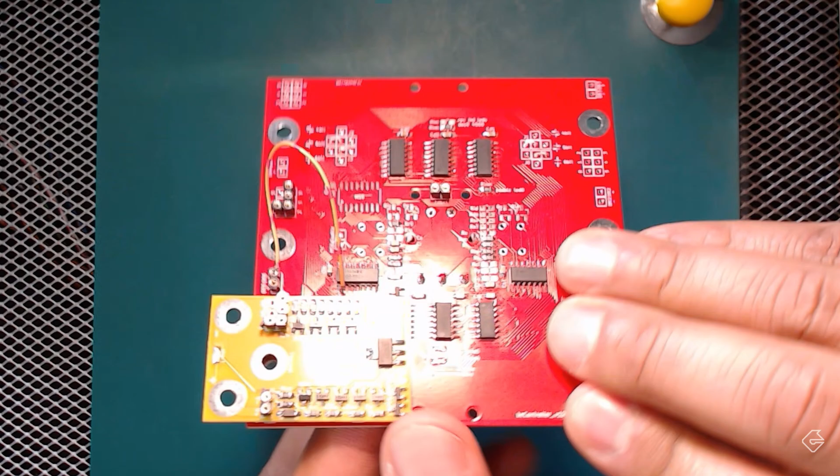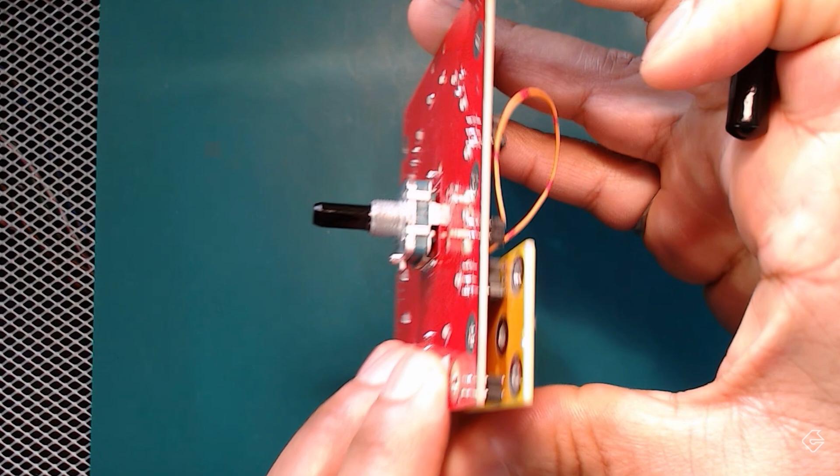If we flip the controller board over, you'll see there's actually room here for 6 of these driver modules. Here's one right here, another one can go there, another one over here, and 3 more on the opposite side. And the way this driver module is connected, it's actually just plugged in using a set of pins. I know it's tough to see on the camera, but these 2 here are the power pins, and if I roll it that way, these ones over here are the 6 data pins.

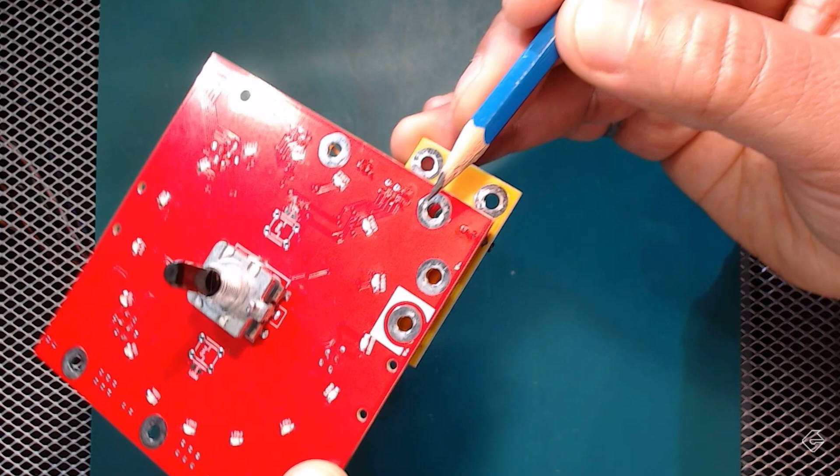You might notice though, this thing is a little bit flimsy. So one of the things we're going to need to do is 3D print a support that'll serve as a conduit for this thermal connector in the middle, so it connects to the controller board on the other side. These other 2 connections here, those are the connections that will send the current right out to the LED.

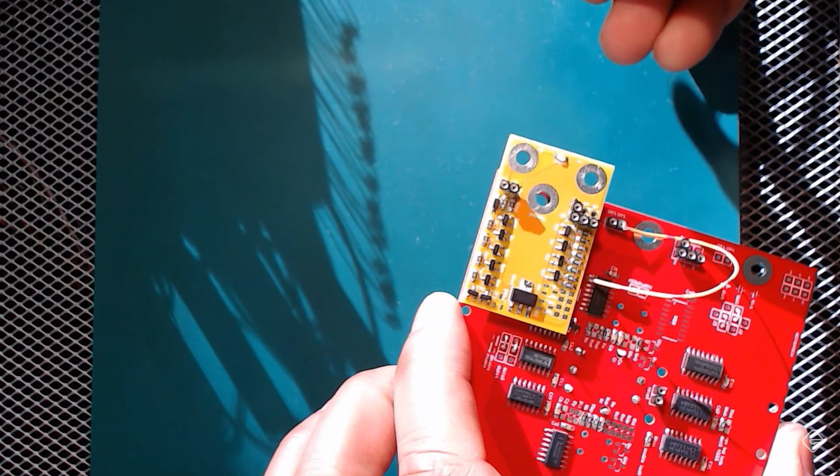These connections have been designed for these spade connectors. These spade connectors will connect to the board using a screw, washer, and nut combination. So we have a washer on the top here. I know it's tough to see, but it will slide into the spade connector like so, and the hex nut at the bottom will anchor it to the board. The hex nut will be positioned like so, but there needs to be something in place to prevent the hex nut from spinning when screwing it in on the other side.

This thermal conduit's also going to use a screw, which is going to attach to the bottom of this controller board using the same hex nut. So we also have to devise a way for that hex nut at the bottom of the controller board to not spin when being screwed in from the top.

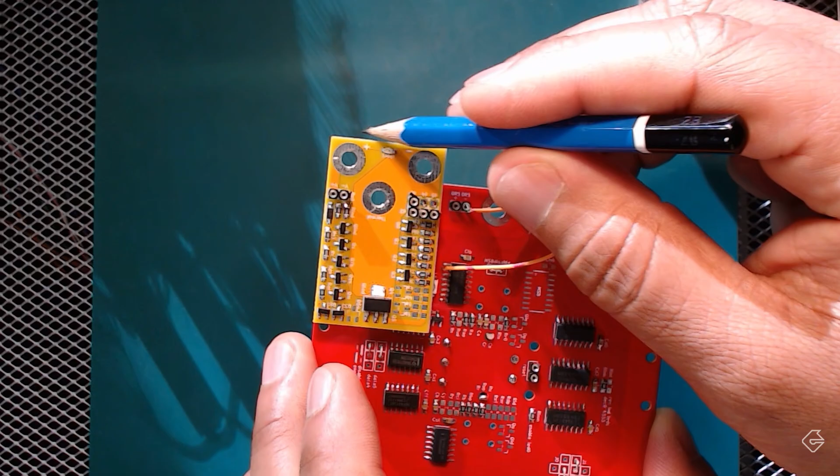So this part that we're going to be designing is going to have at least 3 hex nuts, one for the positive, one for the negative, and one for the thermal. It's going to have a spacer to make sure that this thing doesn't jiggle around. It's going to include a rim to fit snugly around this driver. And this entire part is going to be pretty small, so it's going to have some intricate details.

Let's start with our first line of code. Let's start with defining a parameter for the radius of these hex nuts. Now, if you're following along and using your own nuts, they're probably not the same size as mine, so you might want to get yourself a micrometer, which is fantastic for measuring these tiny little parts. The radius of the hex nuts that we're using measured in at 3.5 millimeters.

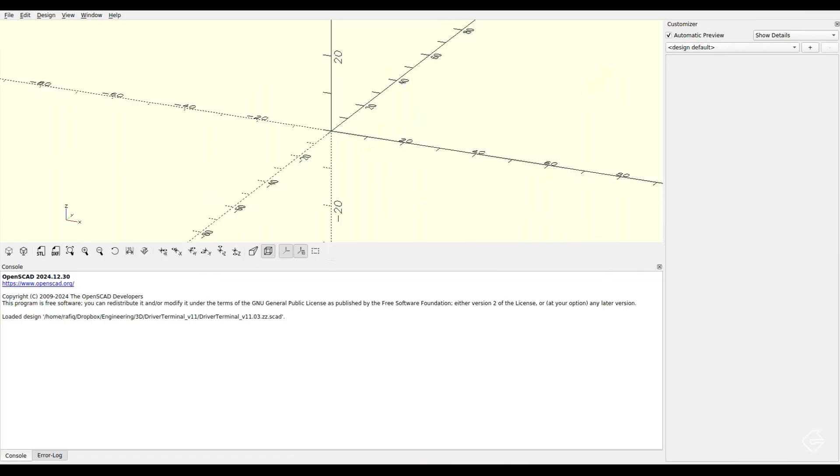Every instruction needs to end with the semicolon. You're going to see as the code gets more complex that some lines don't have semicolons and some do. You'll understand why that is as we start getting into it. And when you render it, there it is. There's our little circle.

Now, a couple of things you'll notice about this circle. One, that circle was created at the origin, meaning the intersection of the X, Y, and Z axes. When any sort of object is created, it's always created at the origin. You'll also see that the circle was created face down on the XY plane. This is also one of the rules of OpenSCAD. Every 2D element is always created flat on the XY plane. And finally, you'll notice that the circle appears to have a thickness, even though we didn't really give it a thickness.

So speaking of that, let's give it some thickness. We're going to add another parameter called hex nut thickness, and that thickness is the thickness of this hex nut, which I've measured at 2.3 millimeters. To give this circle some thickness, we use a command called linear extrude.

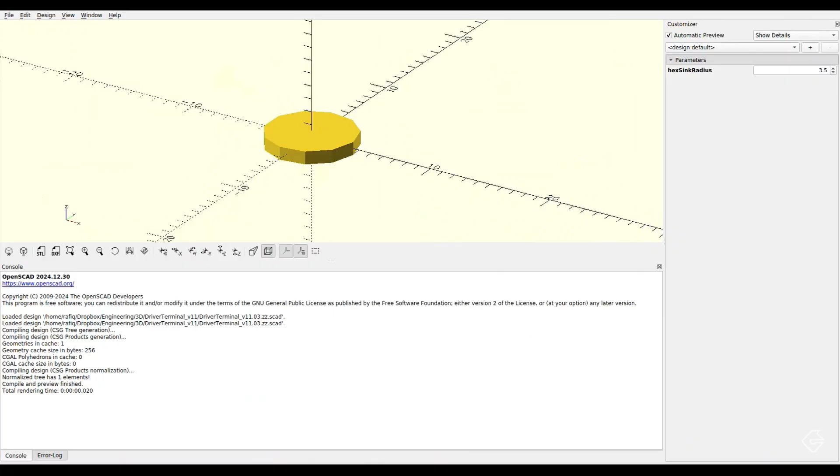Jumping back into our cheat sheet, you'll find it right here under the 3D box. And it shows here that linear extrude accepts a few different parameters. The only value that's required here is height, and so that's the only parameter we're going to give it, the thickness of this hex nut. And when we render that, look at this. Now it's got a proper thickness.

Every 2D object that is extruded by the linear extrude command always extrudes in the positive Z direction, and the resulting 3D object will always sit on the XY plane. Now it's nice that this solid was created at the origin, but that's not really where it's supposed to be. It needs to be translated to its rightful place.

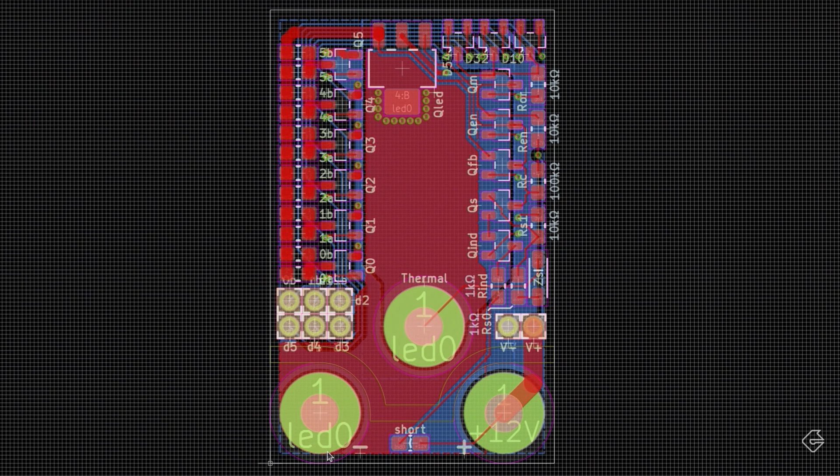This is where that hex nut is going to fit around. If I open up the properties, you'll see that the center of this terminal was positioned at 5 millimeters X and 5 millimeters Y. Going back to our physical one, the center of this terminal is 5 millimeters to the right and 5 millimeters up.

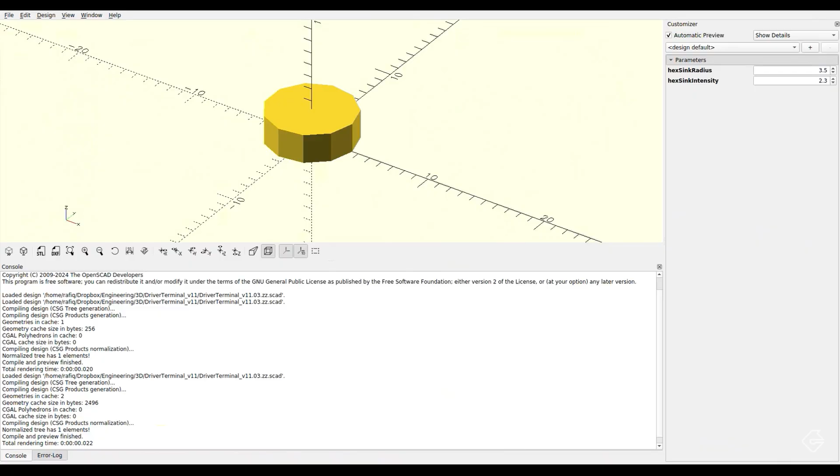Here's the command to translate this linear extruded circle to 5 by 5. You'll also find it on the cheat sheet under transformations. Note, translate actually includes a 3-dimensional vector, x, y, z, but it will accept a 2-dimensional vector like we've put in here. When we render that, our solid moves 5 millimeters to the right and 5 millimeters up.

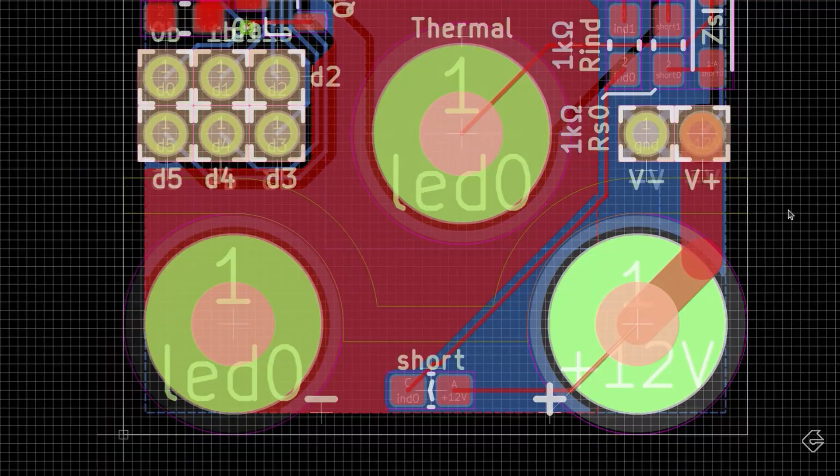But remember, there were 2 terminals. That means we're going to need 2 hex pockets. Going back to the PCB design, there's the other terminal right over here. I could find the location of this terminal too by opening up its properties. See, this one's located at 23.4 millimeters in the x-axis and 5 millimeters in the y-axis. Going back to our physical board, that's this one right over here.

So to create another solid in our code, we simply need to add another instruction. We're using the same circle hex sink radius instruction, linearly extruded by the same intensity, but the translate is different. This one is actually translated to 23.4 in the x direction and 5.0 in the y direction. Rendering that, now we got 2, both positioned in the proper place.

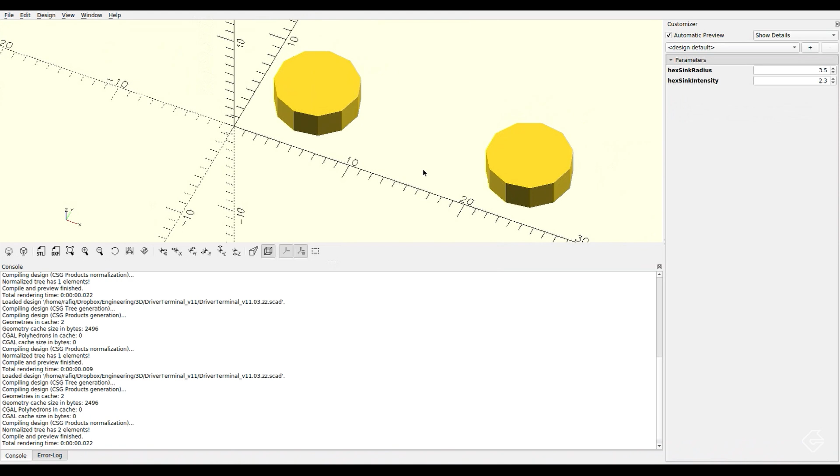Notice in the code, we've defined parameters for these values over here, but the translate vector does not have a parameter. We could create parameters for each x and y offset for the translate vector, but we can also create a parameter for the entire vector, like this.

Here's a parameter, we'll call it vTerminal0, and put the appropriate xy measures in there. And here's the other parameter, vTerminal1, we'll put the appropriate measures in there. Then I'm going to change this hard-coded value over here to reference the new parameter, and the same for this one. Notice how I prefix these parameters with a small v.

I'm going to want to include some comments to describe what we're doing here. So right at the top, I'm going to insert a comment that highlights a v refers to a vector, and it should, in most cases, have an xyz coordinate. You notice how the vectors are encapsulated in these square brackets. That defines a list of items. In this case, we're defining a vector with an x and y component, so it's a list of two values, x and y.

We've seen in this cheat sheet that we could add a third value in there to make it x, y, and z. But those square brackets don't have to mean just vectors. They can mean any arbitrary list of elements. The other parameters in the code define the radius and intensity of these pseudo-cylindrical objects like these hex nuts.

Now we're going to see a few more cylindrical objects in our code, like these screws and washers. So there's a way to kind of package up these two parameters that describe the same thing by using the same concept of a list. But if we keep our naming standards well defined, then it will be easy to remember as we go forward.

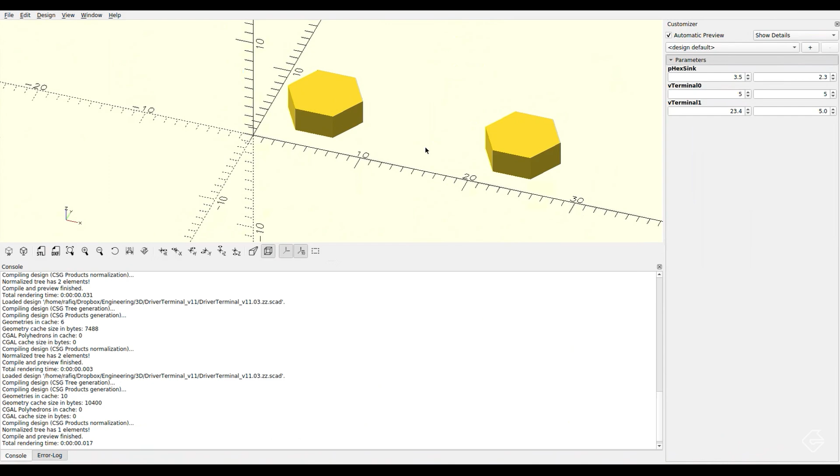All we need to do in our code is include a little $fn equals 6. Rendering that — oh look, we got hexagons. These are beautiful hexagons, but we're not actually recreating these hex nuts.

The hex nuts are right here. We need to create pockets for these hex nuts to fit inside. So rather than creating a solid, we need to create a larger solid and then subtract the hex nut we've just created from that larger solid, giving us a place to insert these metal hex nuts.

So I'm going to add 2 more lines to our code, which will create 2 more circles for now, and then include them inside a difference scope. It looks like this. Now all of the solids inside the difference scope will be subtracted from the first solid in that difference scope.

But these new solids I created are roughly the same radius as the hexagons. We need to make the first solids a little bit bigger, so I'm going to define a new parameter called twallmin — thickness of a wall, or the minimum thickness of a wall — and pop that parameter right at the top, setting it to 0.4.

The reason I'm setting it to 0.4 is a limit of my 3D printer — the thinnest it can print a line is 0.4 millimeters. That's why I define this as twallmin, set to 0.4. Your 3D printer may be different, so choose the value that is best for your printer.

Then I'm going to add that value to the radius of these 2 circles. Notice I've multiplied it by 2, because although the printer can print a single 0.4 thick line, I want to give it a little bit more meat and solidity.

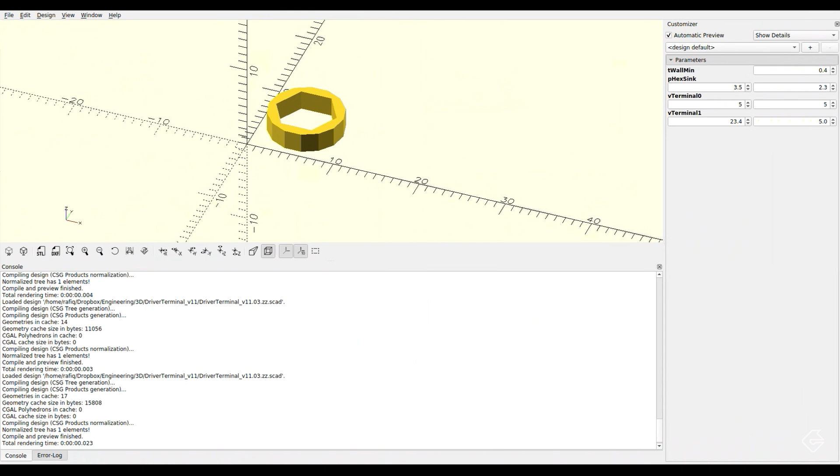That's not exactly what we're trying to do. What we need to do is combine these first 2 circles together, and we can do that with a union scope. Now, the way this is written, the difference instruction will take the union of both of these circles. Yes, those circles are distinct solids and they won't actually be physically combined, but it will be logically combined into a solid. And then the other 2 hex pockets will be subtracted from the union of the first. Rendering that, we get exactly what we expected. 2 circles with hex pockets carved out from the middle.

Now these are really beautiful, but those hex nuts will kind of slip right through. They actually don't have any sort of pocket to fit into. And we want to make sure that when we insert the hex nut, it sits snugly onto a surface. So we're going to have to cover one of those open sides of that pocket. But see, that's a challenge in the way that we've defined our code right now, because this linear extrude function applies to everything inside that scope, which means the pockets and the surrounding material are all linearly extruded to the same height. We don't want that. We want the surrounding material to be extruded to a bigger height than the pocket that's inside.

So the first thing we'll do in our code is create another scope down here called hex pocket, and I'll take this and call it the hex pocket surround. Then I'm going to move these hex pockets into that new scope that we just created and remove them from the surround scope. Finally, we have to take this difference scope and apply it across both of these linear extrudes. Now that we've done that, this union scope is no longer necessary, so we can remove it. And let's not forget, we have to make the surround a little bit thicker, so we're going to give it just a little slice of material on the end of that pocket.

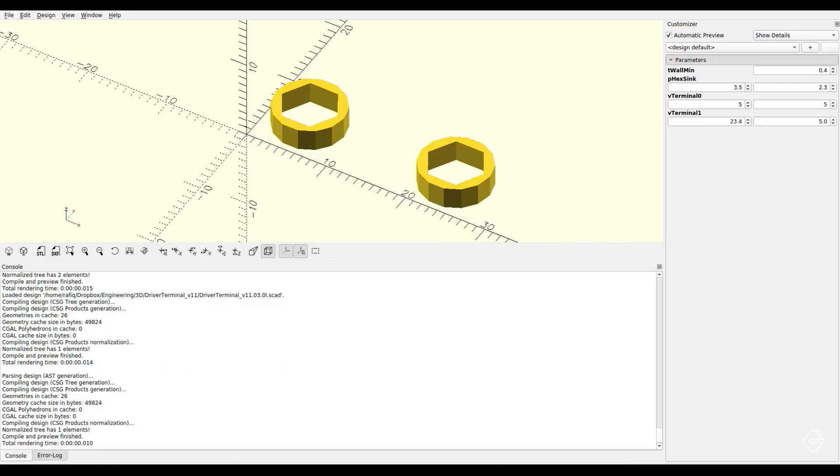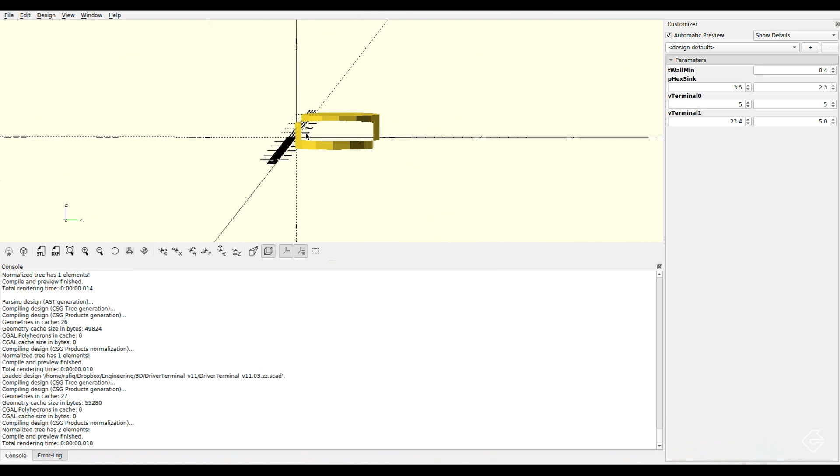Now when we render this, oh, look at that. We've covered it up and we can still kind of see those pockets on the other side. What's going on here? So this is a rendering anomaly that's actually caused by something we'll get into in a second, but there's actually two rendering anomalies here. Let's reorient the view so we're actually looking at these hex nuts head on. And here's another interesting thing going on. You see one hex nut kind of disappear behind the other. This does not look right, and it's in the way that OpenSCAD is rendering these objects. Lucky for us, there's a really easy way to fix both of them. Well, I should say there's an easy way to fix one of them. The other one is a little bit more involved, but you'll get it.

In the cheat sheet, you'll notice under linear extrude, there's this value here called convexity, and it shows up elsewhere as well. Here's one other one in rotate extrude. There's another one down here in this thing called Minkowski. This convexity business is described in the other category here under render. And clicking on this gives you some information about what this convexity is. I encourage you to read it because it's quite educational, but the bottom line is that OpenSCAD is rendering these objects in an efficient way. It's basically taking some objects that are behind one another and deliberately not rendering them so as not to slow down the system or the processes.

And this convexity value basically tells OpenSCAD how many of those behind objects to render. So all we really have to do is give it a value greater than 1, and it will start to render those objects that are behind. So in our code, I'm going to create another parameter, and I'm going to call it fx0, and I'm going to make it equal to 2. The default value for convexity is 1, so 2 should improve our rendering. Then we simply add it as another value with convexity equals our parameter fx0 to every single time we do a linear extrude.

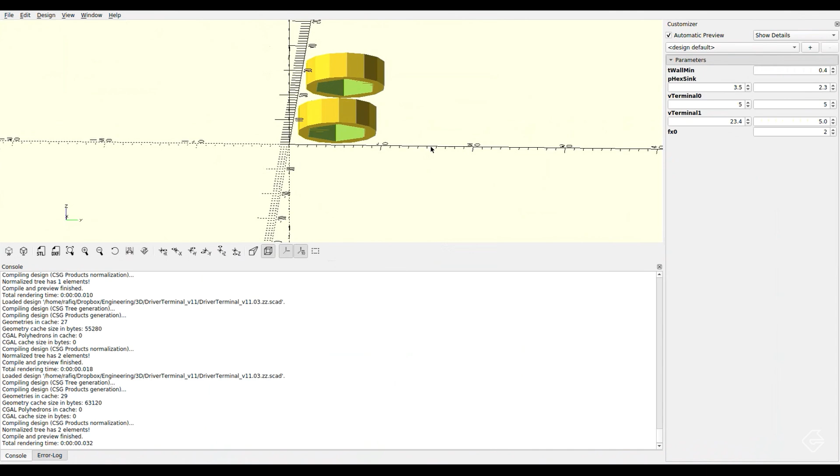Now when I render this, you can see that original kind of behind-object issue goes away. I can see both of these objects clearly, and that white rectangle doesn't appear. But we still have this other strange anomaly to deal with, which is this kind of fuzzy business that's happening over these hex pockets. The reason that's happening is because we've asked OpenSCAD to create a solid and then subtract a hex nut out of that solid.

Now, one of those sides has that extra wall thickness that we added. That's on this side. This side worked perfectly fine. But on the other side, there's a solid on the outside and a solid which is being subtracted. Those two solids share a face. And so because that face exists in the exact same place, OpenSCAD doesn't know whether to include it or remove it. And so what we're seeing here is almost like its indifference of, I don't know, should I keep it? Should I get rid of it? Keep it, get rid of it? We need to tell OpenSCAD whether to keep the face or get rid of the face.

And an easy way to do that is to take that hex pocket and just ever so slightly bring it out a little bit. We're going to bring it out by a value, what we call epsilon. Actually, I say we. The documentation in OpenSCAD calls it epsilon, so I'll call it epsilon too. We'll create another parameter in our code called tEps for thickness epsilon, and we'll give it a really tiny value of 0.01.

I'm giving it that value because we don't need a lot for OpenSCAD to determine that one face is outside the other face, but it's got to be small enough to not make a difference in our final output. And of course, our final output is going to be a 3D printed model, and 0.01 millimeters is way too small for my 3D printer to even notice. Your 3D printer may be different, so you might want to adjust the value depending on the limits of your printer.

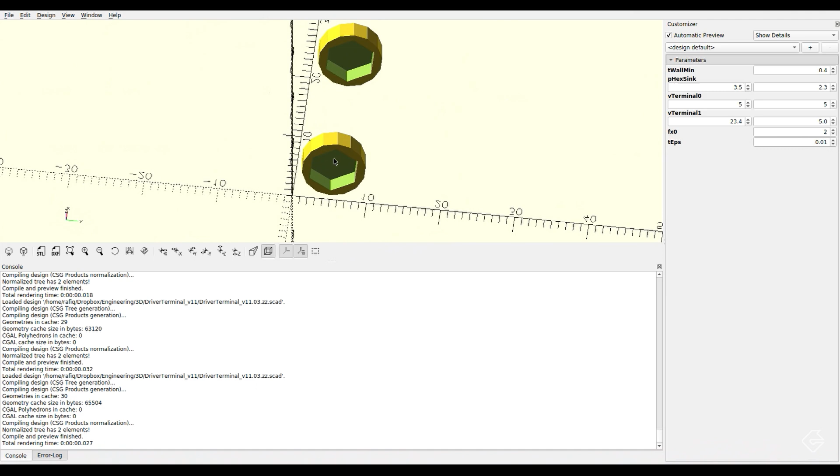So now if you remember one of the earlier videos about limitations of 3D printing, you'll know that printing these two hex pockets face down, although possible, may cause some issues because of the bridging that's going to be necessary inside here. I've done it before and we can continue doing it, but this part is going to be more complex as we start adding things to it. And because I know what complexities are coming, I'm going to rotate our part such that the final output will be easier to print.

Here's a through-hole version of that driver to demonstrate my thought. Right now, those hex pockets will be sitting on top over here, and it will be printed in this orientation. What I'm going to do is rotate everything so those hex pockets will be printed in this direction. That means a 90-degree rotation, and based on our orientation for our design, that's a 90-degree rotation around the x-axis. Back to our cheat sheet, you'll find rotate under the transformations window right over here. You'll notice that it's in here twice. We're going to use the first method.

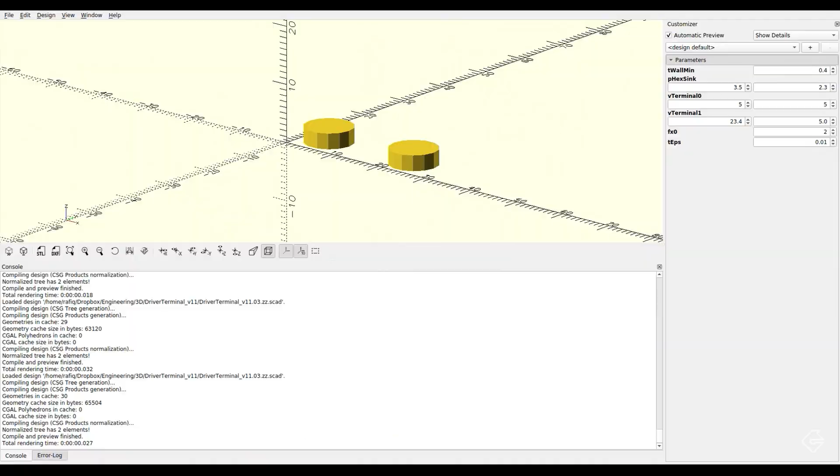To apply this rotation, we're just going to encapsulate everything inside this rotate scope. And I've given it a 90-degree rotation around the x-axis. Once I render that, both of the hex pockets got rotated 90 degrees around the x-axis. Now to make these hex pockets a little bit easier to print, and also because I want to explore some intricacies about this rotate command, we're going to rotate these hex pockets 30 degrees such that the corner ends up at the top. In our code, we can do that by adding a rotation to both of these circles that create the pockets. Notice I'm rotating them 30 degrees around the z-axis.

Now that's a key point because this rotation is occurring before this rotation. So the 30-degree rotation is occurring when those hex pockets are flat on the XY plane, in which case the Z-axis is straight up and down, and it'll rotate it this way. And then both of them become rotated along the X-axis to go here.

If we did it the other way, where we wanted to rotate the hex pockets after the rotation, we would apply the rotation to the y-axis as opposed to the z-axis. I know it's confusing, but this is the kind of thing you're going to have to keep in mind when creating complex objects in OpenSCAD.

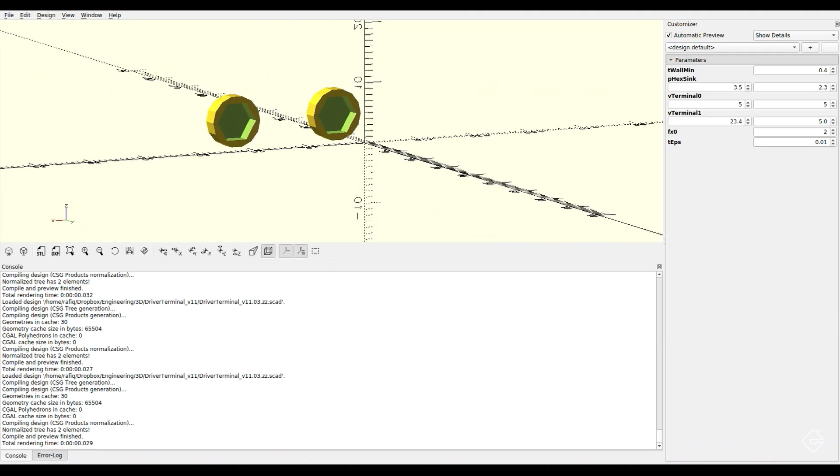So with this layout, when I render it, sure enough, my hex pockets are rotated the way I expected them to be. Now we always need to keep in mind the limits of our 3D printer. That's the reason we rotated it, so it will be printed easier based on things that we're going to add to this in the future.

But another thing to keep in mind as well is the minimum wall thickness. You remember how we identified that it's based on the limits of my printer. We chose a value of 0.4 for that minimum wall thickness. That is based on the minimum line that the printer can draw in the XY plane. But we've rotated this now along the x-axis, so that value no longer applies because my printer has the ability to get finer detail in the z-axis.

So rather than defining the parameter as a single value parameter, I'm going to change that to a three-dimensional vector, which might be the same for the x and y because my printer can only print a 0.4 millimeter thick line in the X and Y plane, but because it can print a 0.16 millimeter thick line in the Z direction, I'm going to include that into this vector. So here's what that vector looks like.

And then whenever we call that parameter, we need to identify which axis we're talking about. So for the hex pocket surround, I'm going to use the Y thickness, which is the 0.40. And then for the radius, I'll use the X thickness.

The other thing to consider when this object goes from digital to reality is that the plastic, when being extruded from our 3D printer, grows a little bit. And if we're trying to fit a metal hex nut into a pocket and we create that pocket exactly the radius of this hex nut, well, the thickness of the plastic will prevent that from actually happening. So we have to make sure that we give the hex pocket a little bit of a gap so that the actual hex nut can fit inside.

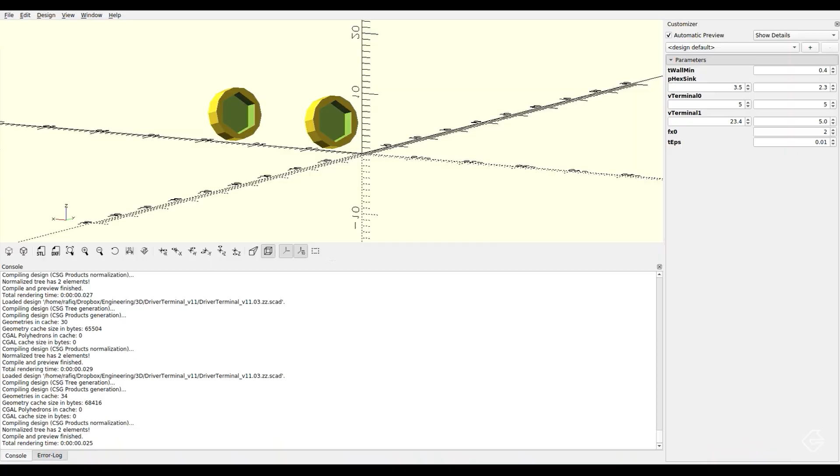Now, since our hex pocket got bigger, I need to make sure that the material surrounding the hex pocket also gets appropriately bigger. Otherwise, we're going to lose the minimum thickness of the wall that we thought was there. Remember, we wanted to have a double wall thickness of 0.4, or 0.8 millimeters, 0.4 times 2. But if we increase the size of the pocket in the middle, then it will subtract from the wall thickness that we have, which means we won't end up with the wall thickness we thought. So I need to beef up the wall by the same amount. Now, when I render it, you may have noticed it grew by just a little.

By the way, you may have noticed that the circles that surround our hex pocket aren't all that circular. They have some very well-defined facets over here. Now, remember how we gave our hex pocket circles 6 sides to create hexagons; we could do the same for our exterior circles, but instead of giving them 6 sides, we can give them, I don't know, like 30 or 40 sides, which would make the circles a little bit smoother.

But that's a dangerous thing to do because, as you might imagine, these circles that we're creating are quite small. And if we make the FN too high for the circles, which would give nice smooth circles, well, it won't make a difference in the end anyways, because they're too small for the printer to discern those different facets. The other challenge is when you make a lot of small fragments or segments, that might overload the 3D printer processing and prevent it from printing the part in any case. But we want to have a lot of facets if the circles are large.

So rather than using the FN, which fixes a specific value for the number of sides, we're going to use 2 other special variables called FS and FA.

Going back to our cheat sheet, you'll find them in the same special variables section over here. FA is a minimum angle and FS is the minimum size. Basically what that means is FA says as the arc of the circle or whatever curved shape changes direction, the minimum angle is the minimum angle that it will allow to exist. So if you set that minimum angle really, really small, then you'll get a nice curved shape. If you set the minimum angle really large, then you'll get the facets. But of course, depending on the size of the circle, it changes.

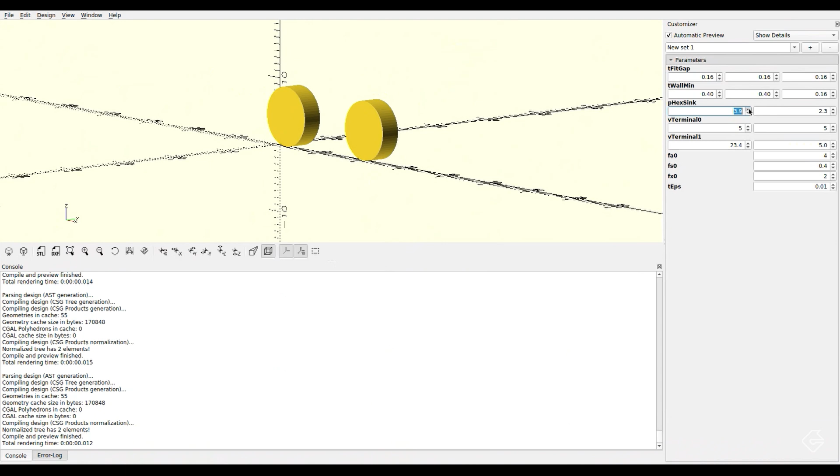And here's another, by the way. You may have noticed on the right side of our window here, all these little parameters are kind of showing up. Here's the fit gap parameter, the minimum wall thickness. Look at that. We actually have the ability to control them right over here. Let's start changing some values here. Let's change the hex sink value. I'm going to move that up. And sure enough, look at the size of our solids. They're growing based on this change that I'm making to pHexSink.

And I can do the same for the intensity, which is the thickness, and watch the thickness of these hex sinks grow. This is a neat little thing. We can do that directly in OpenSCAD without changing the code, which allows us to kind of play around with these different parameters. It's a nice little thing to have.

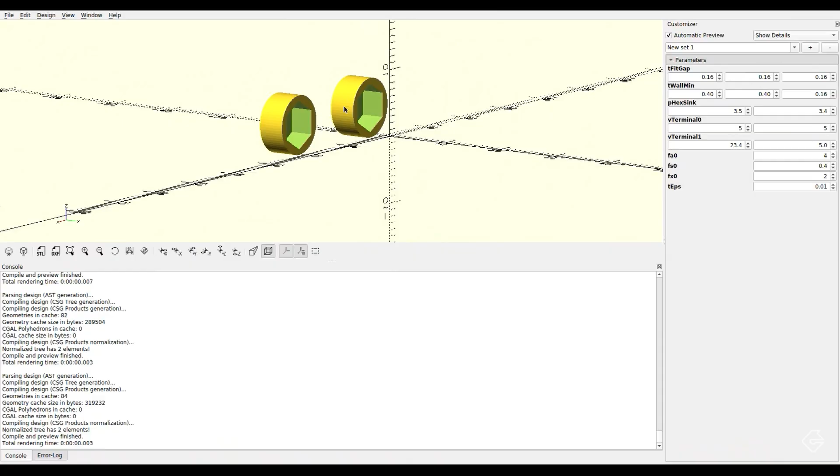And here we can also play with those 2 new parameters that we just created, FA0 and FS0. Watch as I increase the minimum angle. The facets around the circle change or increase to reflect that minimum angle. This is a great way to kind of play around to see which is appropriate for you.

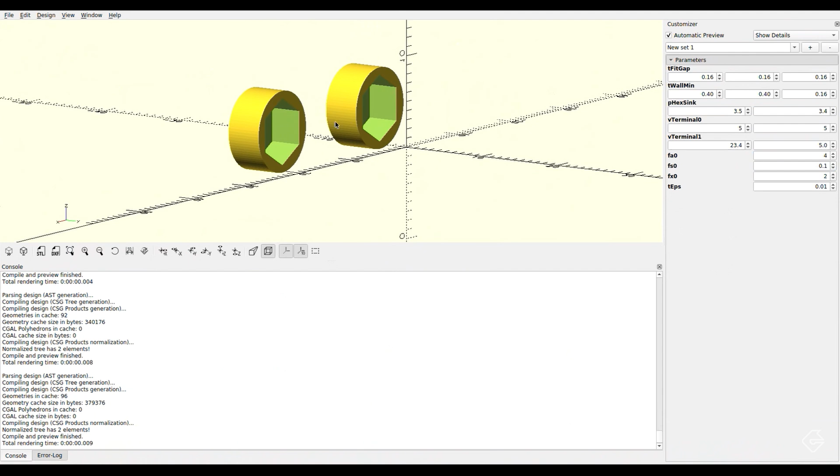Same with the FS. If I bring that down to 0.1, you'll see my circles, well, didn't change because the minimum angle is still set at 4. I have a limiting factor here. So even though I decrease the segment size, I can't get any smaller because I've set the limiting angle. If I reduce my minimum angle, you'll see the circle get way smoother.

You may also have noticed I can't really change the precision of any of these values. So here I'm trying to type in 4.1 or 4.2 and it won't let me do that. If I wanted to change the proportion of this hex nut, maybe I want to have it 3.55, it won't let me get any more precise. But I can explicitly define the precision of our variables using this really neat OpenSCAD trick.

I can even organize these parameters under headings by adding this special comment into the code, like so. All of those parameters show up under collapsible headings in the parameter listing on the right. And notice the very last parameter, I used a special header called hidden. And sure enough, it doesn't show up in this list.

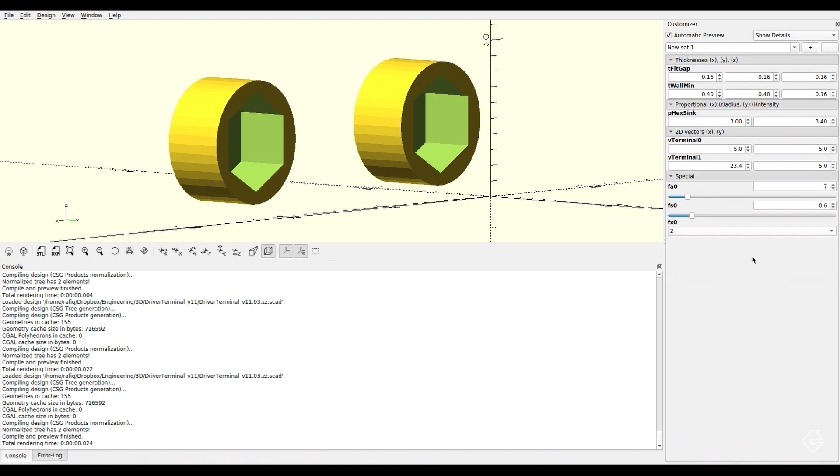Whew, that was a lot. Okay, so admittedly, our model doesn't look like much yet, but we covered a lot of material and built a wonderful foundation for when we get into some of the more, I don't know, intermediate OpenSCAD 3D modeling stuff.